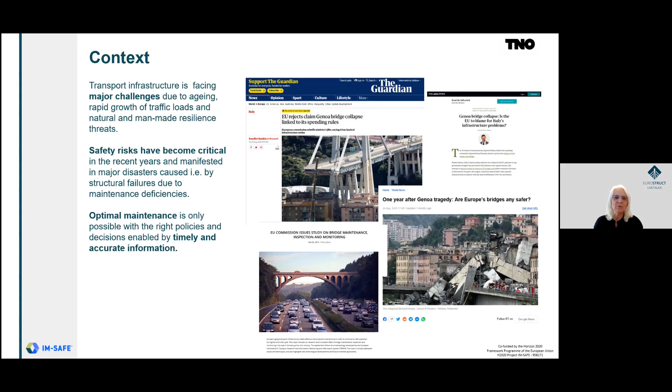Optimal maintenance, as stated here, requires timely and accurately available information. Monitoring is an opportunity to have access to this kind of high quality information. But there are also situations in which you have to ask yourself whether monitoring is the best or the only option.

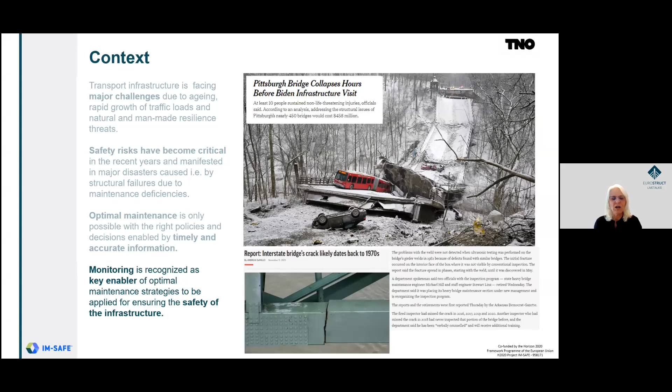So limits of detection and availability of data, how to deal with that - this will be a few of the points I will try to discuss. Focusing in the first part on the challenges and opportunities for data-informed assessment of structures, then going quickly into the topic of decision-making, to see to which degree information can be of use on top of use in safety assessment. In the second part of my presentation, I will discuss the role of standardization, and the challenges in developing standardization that supports rather than constrains users. If time allows, a few sentences about digitalization.

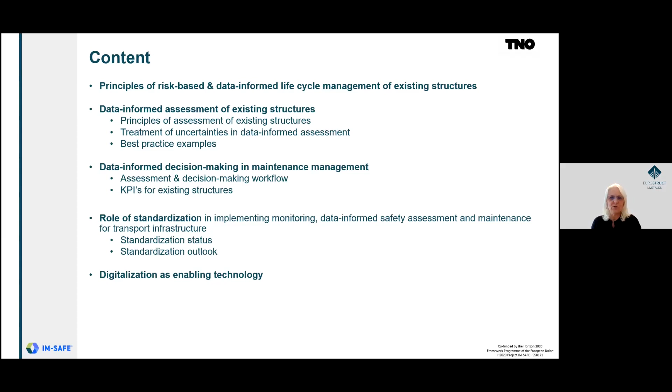When we talk about risk-based and data-informed lifecycle management, we have to think about it in the context of differences between new and existing structures and the opportunities that creates. One major difference is that for existing structures, we have access to relevant information, and we can collect that information. Cumulative knowledge of the performance of the structure during the life cycle is of huge value.

What kind of information are we talking about? For existing structures, we can collect data at different stages - information from the design and construction stage, and we can intensify efforts in collecting relevant information during operation and use. This information can come from different sources - facts and records from documents, but also observations we make while gathering information about the state of the structure or the factors influencing that state.

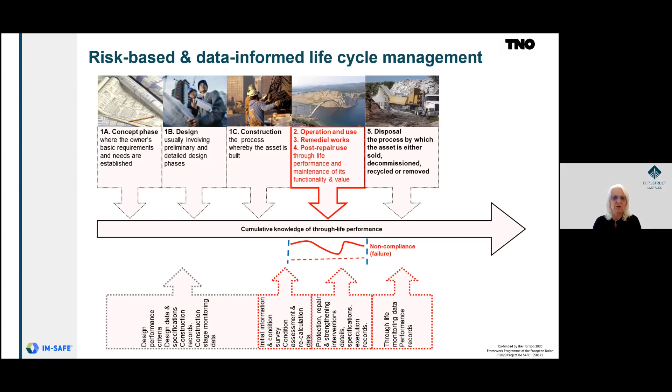When we look at differences between new and existing structures, we can group them into certain categories. We have access to information, but what is more unique to existing structures? One important difference is the change in magnitude of costs needed to increase the performance level of existing structures. The cost of safety measures for existing structures is higher than for new design, and I will discuss how that influences assessment.

The same discussion will also deal with the difference in service life, or residual service life - existing structures usually have a shorter remaining life than the design life of new structures, and we need to take that into consideration in assessment. One question is how to do it.

Knowledge levels, as touched on when showing this cumulative knowledge collection throughout the life cycle, bring information, but we need to handle this information with care, with understanding of uncertainties in that process. And a last notion - deterioration mechanisms, changes of the structure's condition over time, can be the ones expected, but also ones that come as a surprise.

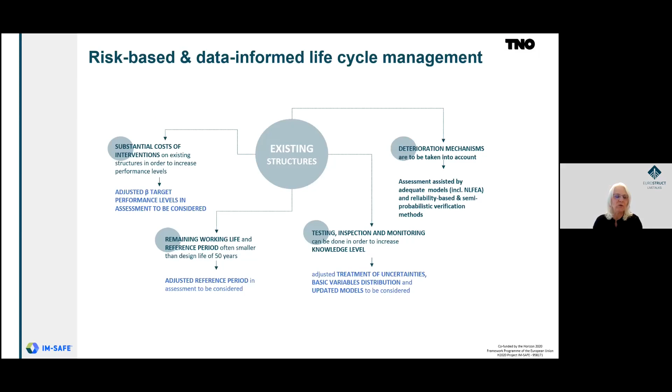How to assess that this processes take place, and also how to make a choice of appropriate models to consider in the assessment. Now, going into a few of these aspects in more detail and trying to see how can we handle that.

And since these costs of the improvement of the safety level, upgrade costs, are higher, but we also see that in case of cost-based optimization, we arrive at another optimum, which means that we may consider from the economic point of view that there is another target to be formulated for existing structures comparing to the new structures.

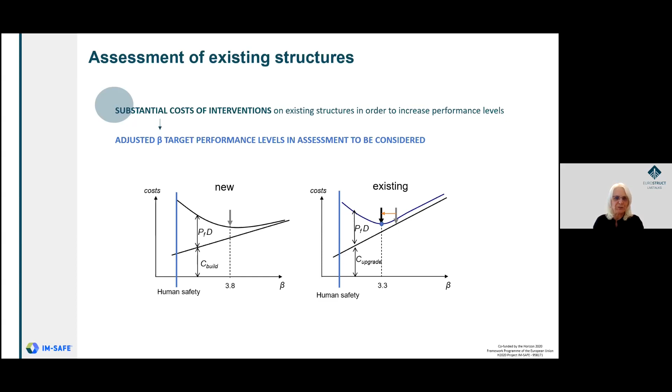In fact, what it means is we need to be prepared to pay the costs of improvement of our infrastructure and keeping them in use. Well, in the future, this may even become more complex when we add to that discussion also the costs and benefits of structures with regard to environment and its impact on optimization.

And two of the important changes with regard to design which I would like to bring to your attention. The first one is with regard to these target reliability levels.

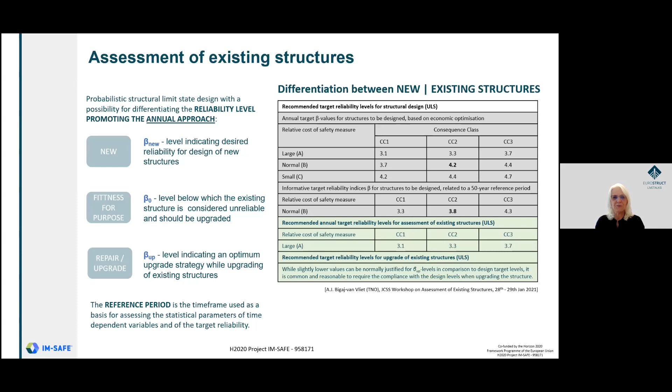Well, now we are talking about evaluation. And when we talk about evaluation, we need to talk about the way we will deal with the uncertainties in evaluation. And uncertainties in evaluation are inevitable. Yes, we do have different reasons for that.

We have reasons that are inherent - the materials and the processes have their random distribution, aleatoric uncertainties stem from that. But there is also another source of uncertainties in assessment, and this is attributed to lack of knowledge. And lack of knowledge can be, again, of a different origin. There can be lack of knowledge that is simply us not understanding how the systems are working and how the processes are working. But there is also lack of knowledge that is a consequence of not observing.

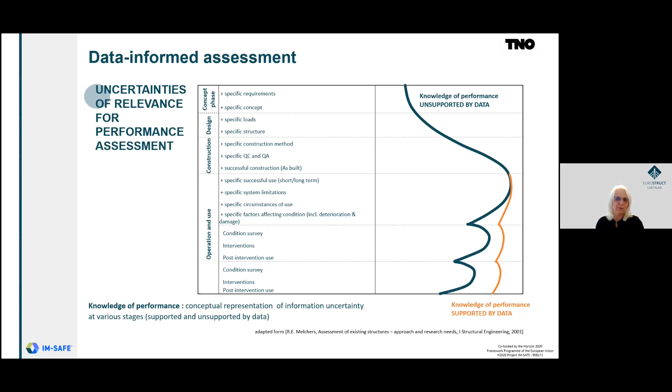These changes can be an effect of system limitations, different circumstances of use, or different factors influencing use—for instance, deterioration or damage. There can also be changes in the condition of structures that happen on the occasions of interventions. These observations can be made, and knowledge of performance can be improved and supported by data. In such a situation, our knowledge is higher.

What does this mean when we go deeper into that? It means that, based on information from inspection, monitoring, and testing, we are able to reduce certain parts of the uncertainties. Not all—there is this aleatory variability of processes and materials which is inherent and cannot be reduced by obtaining information. But we can use information to reduce other substantial parts of the uncertainty: statistical uncertainties, or other parts more related to modeling uncertainties, for instance.

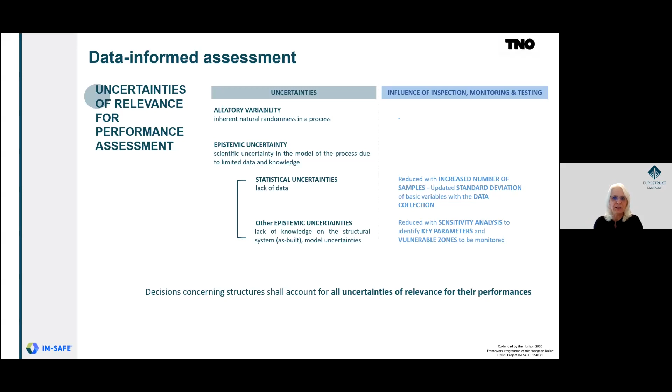In design and in assessment, it is essential to take into consideration all these types of uncertainties. Which uncertainties are these? I will try to illustrate and discuss that, taking as reference something you probably know very well: the treatment of uncertainties in structural design by the partial safety factor format, in which we have uncertainties associated with different components of that approach.

On the side of the loads, we have load models, and these models are, of course, stochastic models. So there is an uncertainty in this kind of model. We can quantify it, and in the context of partial safety factors, it's indicated here as gamma small f. We also have models that we use to model action effects on the systems.

And again, these models have their own modeling uncertainty. Both contribute to gamma F capital, which is the uncertainty on the side of the loads. On the side of resistance, in a similar way, we have material models with associated distributions and associated uncertainties. We also have resistance models with modeling uncertainties. Both contribute to the uncertainty on the side of resistance.

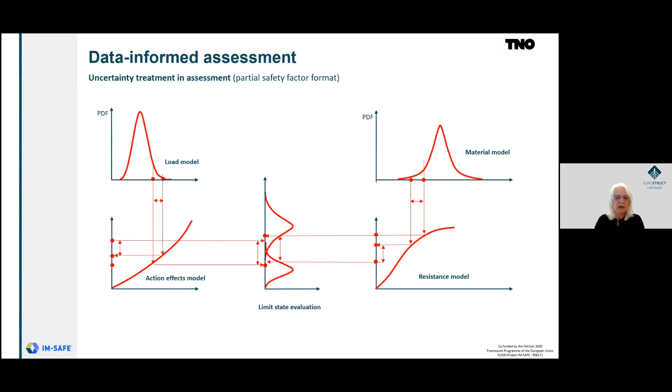These changes may eventually lead to the situation shown in the center of this figure: limit state evaluation does not give the result we would like to have. We may end up in a situation where we have to say the structure does not fulfill its requirements—the resistance is not sufficient to carry the loads. Well, is it true, or is it just our perception? This is what we try to illustrate in this diagram.

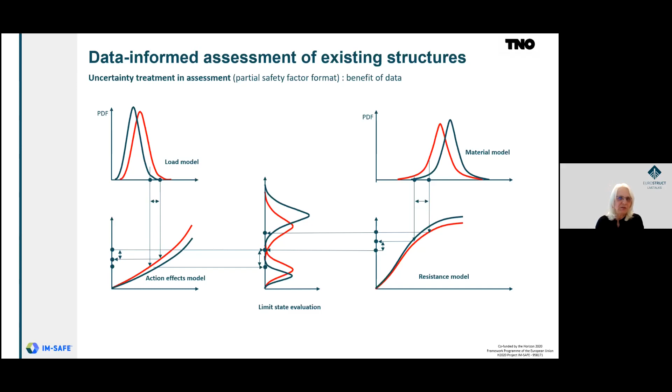And this shifting towards reality can be a benefit of data. It can be a direct benefit of information. Now, when we are talking about information, it's good to understand that we have different sources of information in assessment.

We have direct information, which is related to the quantity of interest. Quite often this will be material properties, or for instance, the loads. But we can also have access to indirect information, and this is more on the global response level quite often, or on the level of the action effects.

And here we have different ways to benefit from this kind of information. For direct information, we can rely on updating basic variables, for instance, by Bayesian updating. In case of indirect information, we can either try to update the models, or we can eventually, in different evaluation formats, update the probability of failure directly.

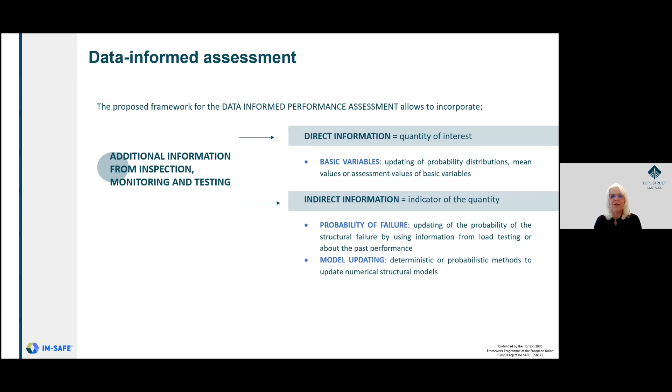These approaches can be captured into frameworks and formats. And here is an example of how this could work in a case when we are using the partial factor method.

For instance, when updating resistance and action distributions is done with the Bayesian approach, the partial factors are adjusted to account for the direct information about the distribution of certain material properties. And of course, what is very essential is including adequate models to account for the phenomena that are influencing behavior of the structures.

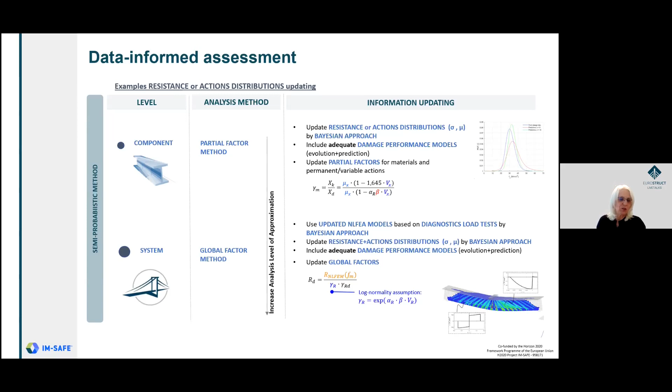When we are using a global factor method, that is usually done in case of numerical analysis, this is in concept similar, using model data to update the models, or using information to update the distribution of actions and resistance. This is not only theory, we have also practices, examples in the practice.

When this kind of advanced assessment took place, here you see the pictures describing the example of the Dutch field lab project. In that case, on the Van Brienenoord Bridge, which is one of the busiest bridges in the Netherlands, a steel structure, the fatigue crack growth has been monitored with acoustic emission technique.

Based on this monitoring data and additional condition state data, and using detailed fracture mechanics based models, the simulation of the fatigue behavior has been performed, enabling improvement of the prediction of time to failure. This kind of approach can be very well implemented also in an early warning system, or even in real-time prediction of fatigue service lives.

Another example is when we look at the updating of the information on the actions. One of the main sources of uncertainty in the assessment of structures is uncertainty about loads. And it's also very important to be very prudent in choosing which part of the modeling we will attempt to improve. So the most dominant uncertainties are the ones we should target.

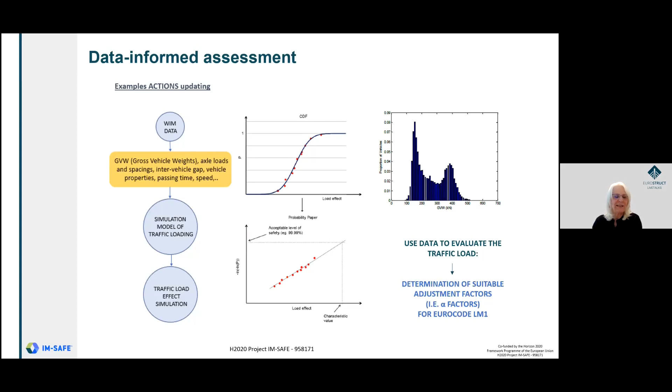We have also very good examples of practical applications, like in this case, again a Dutch example, the field lab Moerdijk, where the bridge WIM monitoring data have been analyzed and processed to improve understanding of the live load on infrastructure. Based on that, we are able to derive traffic load models from monitoring data, and these models can be used in the assessment.

Of course, the expectation is that these case-specific models will be lighter than the standard models that are provided for overall asset assessment. We can have object-specific or network-specific models. This is also bringing a huge benefit to the improvement of the assessment.

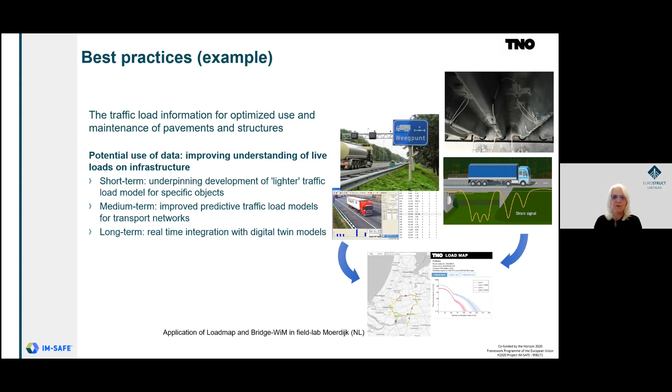Well, more of this kind of examples you can find in the online database that has been created in the IM-SAFE project, and they are quite different, so it's worth having a look at that.

As I said, I also wanted to touch the issue of decision-making in the context of asset management and maintenance. And what has also been proposed in the IM-SAFE project is the workflow in which information is included. And when I say information, data, I need here to introduce another concept, a concept of key performance indicators.

This is a concept that allows us to be very clear about which kind of observation is meaningful in the context of a certain level of assessment and certain type of questions. I hope that you can somehow read this slide, but if not, I will try to help you by enlarging certain parts of it.

We do distinguish different levels of demands in assessment, which is quite often a function of the criticality or the risk level for the parts of the assets or objects within the network. At a certain low risk level, we could work with other processes: routine maintenance, simplified assessment, and an appropriate set of performance indicators.

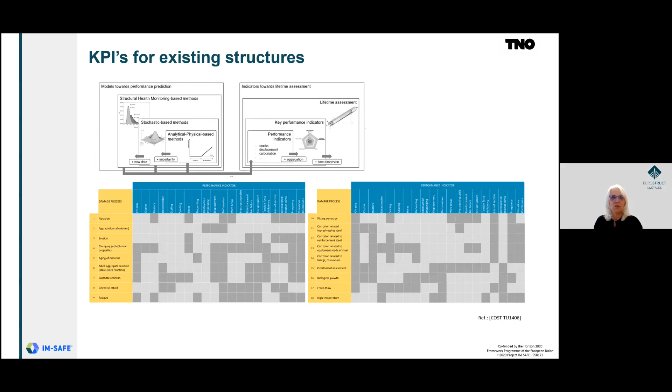Well, now I'm going into standardization, because that was actually the purpose of having that introduction. Now, what we observe is that structural monitoring is already in use, and there are quite successful attempts to develop guidelines to facilitate that process.

When we talk about facilitating the use of information from monitoring, we are talking about different types of issues that need to be resolved: issues related to setting up the monitoring system, issues related to processing data, issues of assessment, but also, of course, issues of risk evaluation and prioritization of structures for maintenance.

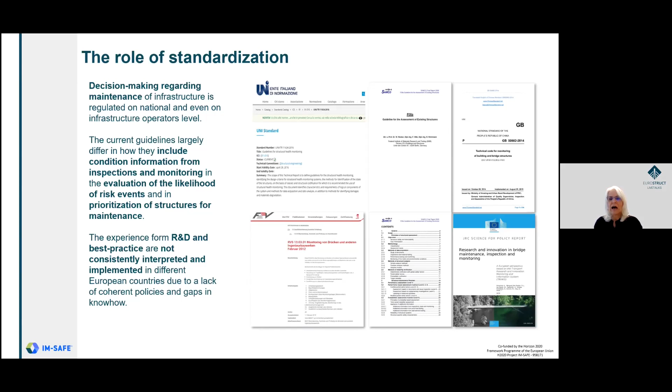And what we have done was to investigate the status of the current development of standards. As you see, there are numerous. What they have in common is that they all attempt to use data in an efficient way and facilitate that process. Most of them are risk or reliability based, and there are some very substantial differences in the way they treat different aspects.

I was discussing in the beginning this differentiation into reliability levels for new and existing structures. This is implemented in the Dutch standards. This is not implemented in every standard.

We were showing the framework for assessment and decision making, which is quite well implemented in the Italian standard on risk management and monitoring of existing bridges.

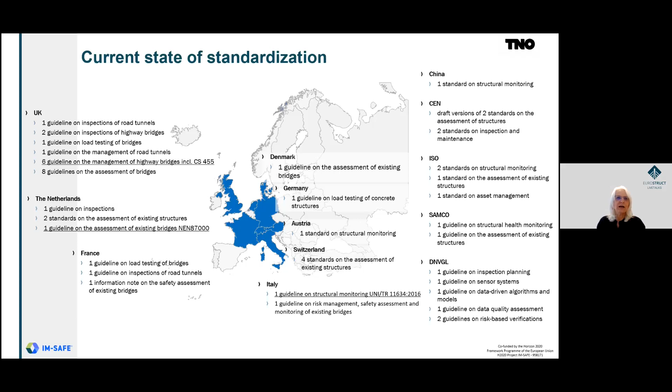So what is the feeling that we have? There is a lot available, there is a lot of thinking, but we are actually missing harmonization of these approaches. What we are missing is taking that to the level of European standardization in context of the already existing standards, because we do have a very well developed set of standards for design of structures relevant for transport infrastructure.

We are in the process of reviewing the Eurocodes also for existing structures, so we are expecting and anticipating certain changes in that domain, and it all opens possibilities. At the same time, we see that this set of standards does not facilitate everything.

If we indeed want to have this transition towards risk-based maintenance management and more preventive maintenance strategies that take benefit of information, we need to go a bit further, and formulate principles and requirements for structural monitoring. We need to make sure data-informed approaches are well implemented in the codes for assessment, and we need improvements in practices, facilitated by standards with regard to maintenance management and condition-based maintenance strategies.

With that idea in mind, we propose, in the course of the IM-SAFE project, a few developments in terms of standardization. The first one involves having a new standard on structural monitoring for infrastructure, since we do not have one.

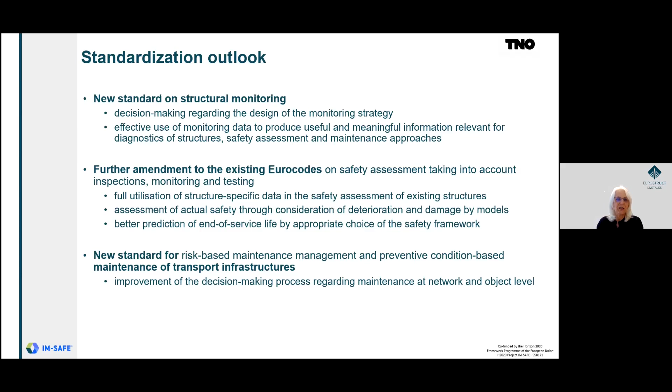And then last but not least, we also need a new standard for maintenance of transport infrastructure that improves the decision-making process. Now, just a few single highlights of what could be the additions or the objectives of having such a standard.

Again, before going into more detail, I will repeat: the standards must support, standards should not constrain. So when talking about a standard for structural monitoring, it's important to have principles of setting objectives of structural monitoring, and support for methodologies for translating data into information.

This is more related to data processing and pre-processing and all the processes around that. We also need to keep in mind that technology in the domain of sensing and monitoring is still developing, and that development is not going to stop anytime soon.

So openness to innovation is one of the main constraints under which the standards need to be developed.

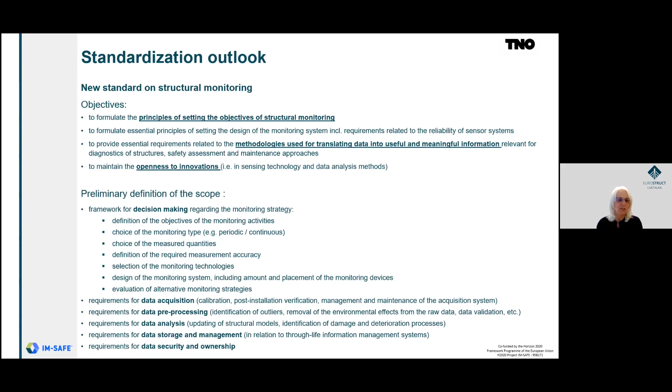Again, in this bullet point list, what we are thinking about is support in definition of the objectives, support in choice of the monitoring type and monitoring techniques, and setting up requirements for monitoring, and also design of monitoring systems involving rational decision-making with regard to choices, amounts, and placing of the instruments used for monitoring.

With regard to further amendment of existing Eurocodes, I'm now talking beyond what will be achieved in the ongoing revision. So we are also talking about the period after completing the current revision.

Appropriate models, which have reduced uncertainty compared to models that do not appropriately account for the effects of deterioration or damage, are needed to perform assessment of structures where these aspects play a role. Also, use of structure-specific information, for instance related to traffic loads, can be of huge importance in data-informed assessment.

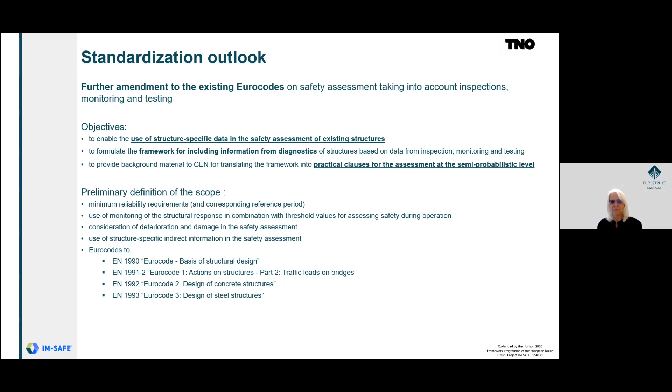And with regard to a new standard on risk-based and condition-based maintenance strategies, here we are again talking about principles of the decision process. Particular attention could be given to formulating key performance indicators and choices of these indicators at different levels of decision-making and assessment.

Also, the aspect of risk-based process of prioritization of assets for maintenance should be considered. One very important aspect explicitly mentioned here is documentation and collecting of information.

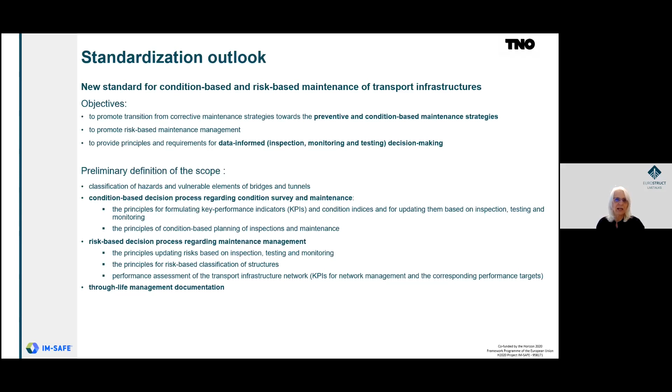I started with cumulative knowledge. It is an opportunity, but it comes with the need of setting a standard for having this information collected, organized, analyzed, and also made available. This brings me to the very last point I was hoping to address, which is digitalization.

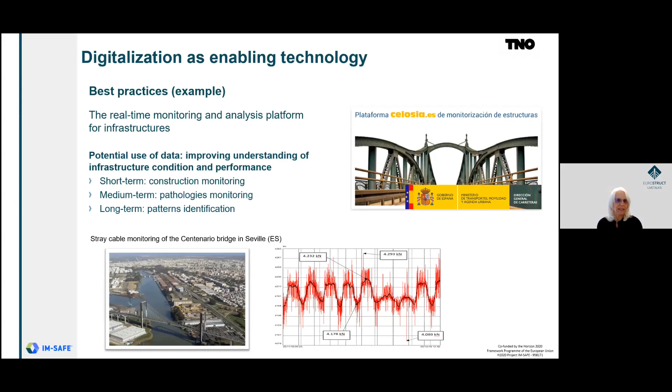Digitalization as enabling technology. We already have examples, like the one shown here from Spain, in which data platforms are being created with the objective of supporting users in collecting, keeping, analyzing, and processing data towards meaningful information. Now, that data is the topic for which standardization needs are also relevant.

The IM-SAFE project does not explore that to every detail, but in any case, what we do suggest is identification of the standardization domains and proposals for having certain approaches in standardization. But also this very important notion on top of that page: data should be findable, accessible, interoperable, and reusable. Very generic and yet very fundamental.

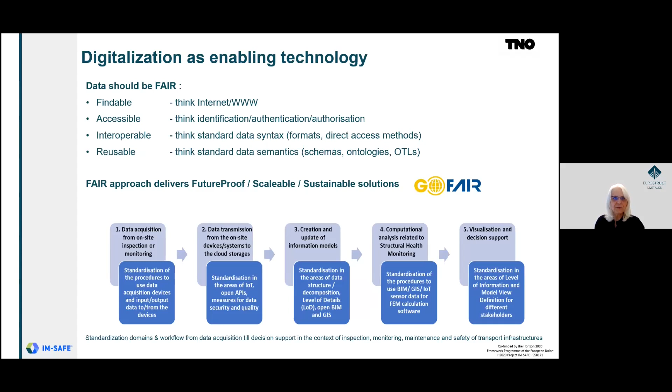When we are talking about future improvements of our practices, this needs to be kept in mind, that we may be hindered in the future if we do not take care about the quality of our data assets. So in summary, we are quite lucky, because we are now at the moment in time where we have a lot of technology development made available to us, and we do not need to wait much longer to start using monitoring as a valuable support in assessment and maintenance decision making.

We also have a lot of know-how across Europe, manifested in these national attempts to develop standards, which we can benefit from in trying to have a harmonized European approach to standardization. One very important thing is acceptance. We have to be aware that there are different practices across Europe, and we have to connect to these practices when developing provisions and proposals for standardization.

Our aim and objective is to prepare input for that process with a solid background that will enable formulation of the mandates that could be taken by CEN as the basis for their activities towards further development of harmonized European standards. And with that, I would like to finish the presentation, and we'll be glad to take your questions.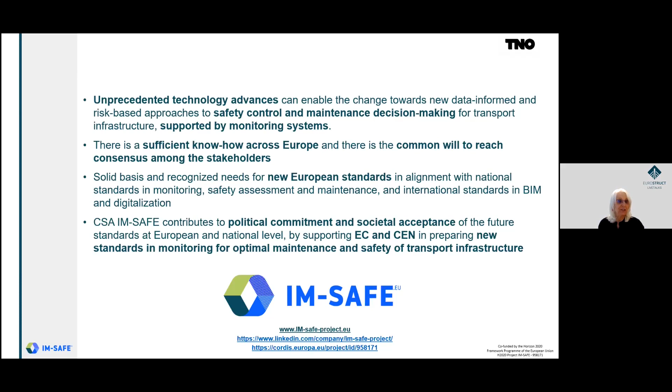And how the decision process, starting from the inspection up to finally the risk-based decision, works? Yes, I already mentioned the online IM-SAFE Wikipedia, which I will try to scroll back so you can see the link to it, because this is nice if people can find it. Yes, this one.

We have developed an online repository of a huge part of the knowledge that we have collected. As I mentioned, there is a collection of best practices in monitoring of infrastructure, but we also expand that, and this will be completed shortly, in April, in which we will present best practices or good practices in using the data in this kind of analysis flows for the purpose of

supporting decision. And what we are also trying to do there is to show these different alternative paths that fit with different classifications of the criticality of the assets. So in the Wikipedia, you will also find examples of decision-making which involved monitoring and decision-making that involved routine maintenance and the associated inspection levels. This, I hope, to some extent also shows how all these elements work together in practice.

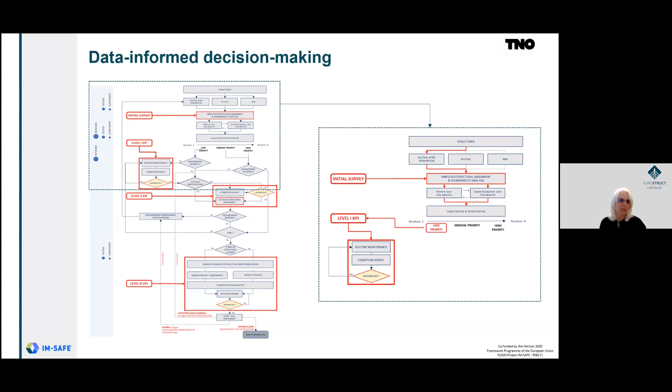Yes, again, that's what I say. We do not prepare a mandate. We prepare a proposal that could be considered for mandating CEN. That decision-making in mandating is a legal process in which the project does not play a role anymore. That's beyond our project obligations, but also our project influence. I hope that to some extent answers that question.

That is also my understanding of the Horizon project, but the products of the Horizon project have no obligation with regard to the lawmaking, if you want to put it that way. This is something that is not an obligation on one hand, and also has no direct influence on the legislation on the other hand. Exactly, okay.